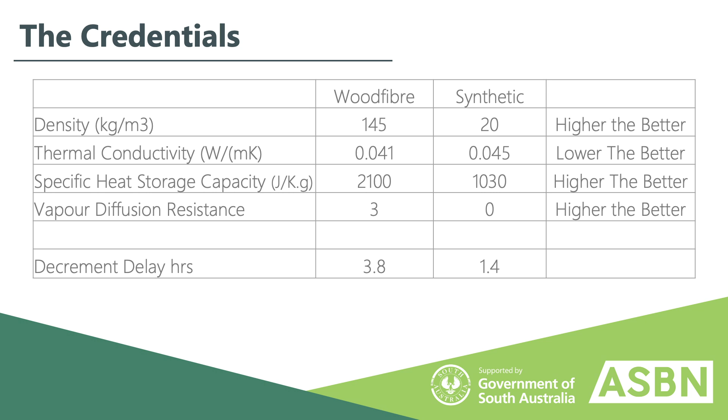So a bit of experience and knowledge. As mentioned, I've served my time in the UK as a master carpenter, a licensed builder in New South Wales, ran my own building company in the UK, where I researched healthy building materials and really questioned why we were doing what we were doing. Why are we using these materials that seem good on paper, but then you use them and they're difficult to detail, they're awkward to cut, they're itchy, loads of practicalities that you don't get from the classroom environment.

So the passive house, as most of you probably know, helps look at those components of a building: the insulation, the low thermal bridging, the airtightness, ventilation, the windows and the doors. But what it doesn't do is then use a technology like WUFI, which is an analysis software that will look at the temperature, the relative humidity and the moisture content within that proposed build-up that you can model in the PHPP.

And that will tell you, if you use these materials, you're going to get damp and interstitial condensation at this point in the building. And at these times of the year, it's more risky or less risky, et cetera. So again, it's not quite black and white. We've got to really understand what we're looking at and why we're choosing to look at it.

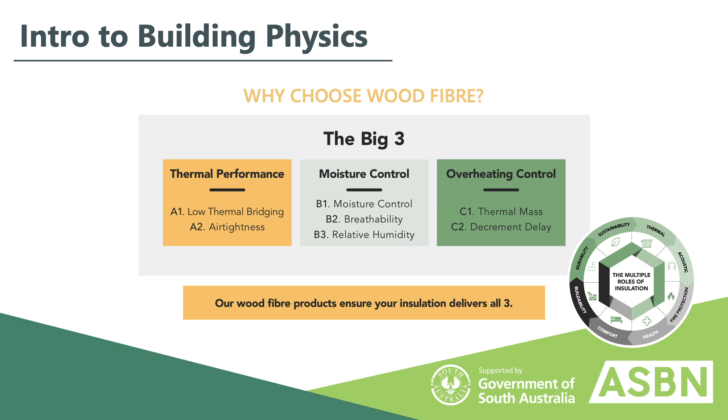So a bit of an intro to the building physics. The big three are the thermal performance, the moisture control, and the overheating control. So why would you choose wood fibre to look at some of these? Bit of a case study. A lot of this data is available on our website and materials. So if you do want to catch up with me later on, we can chat about that over the coming weeks.

This case study was a full wood fibre house, fully vapor permeable. And the case study is pretty interesting, with both positives and then a design review section that highlights the weaker points of the building and how to address that.

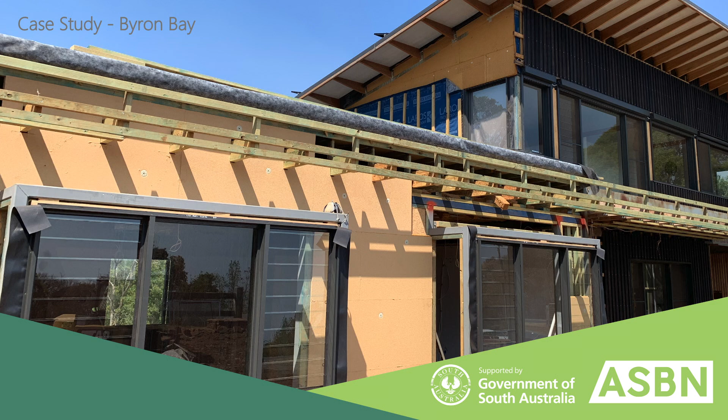So low thermal bridging, you basically just think of it as dropping a tea cozy over your house to reduce, and the phrase I use is low thermal bridging rather than thermal bridge free. Again, because it's not necessarily black and white. So low thermal bridging is basically the concept of wrapping your building to reduce those thermal bridges.

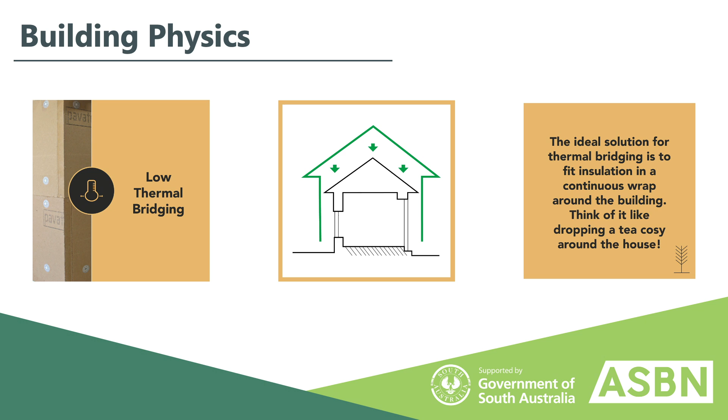A continuous wrap of insulation is the best way to do that. And bearing in mind, when you do that, you need to have one of those 4 criteria, which was high vapor diffusion. Airtightness, most people are fairly aware of this at the moment.

Vapor permeable membranes, and essentially reducing the leakage of that warm or cool air from inside your building to help maintain a more stable temperature with less fluctuations. So that's quite a crucial one.

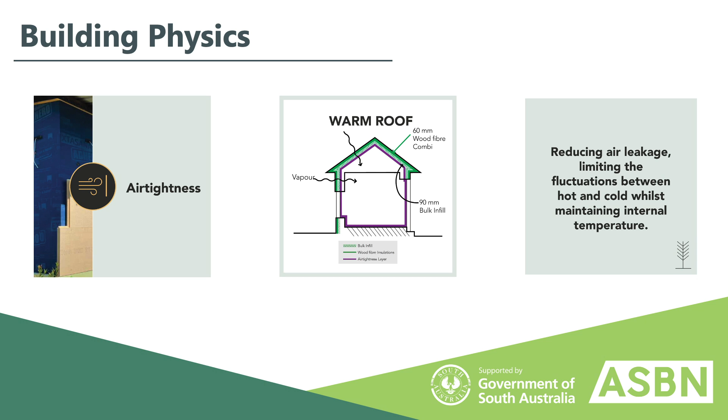Breathability. You obviously need to be allowing moisture and vapor to pass through the building. Now, this is a big one, particularly amongst builders who kind of think we've got to keep the moisture out, keep the moisture out, keep the moisture out. Okay, so don't have a shower, don't have a party, don't breathe. So we have to use materials that are highly vapor permeable.

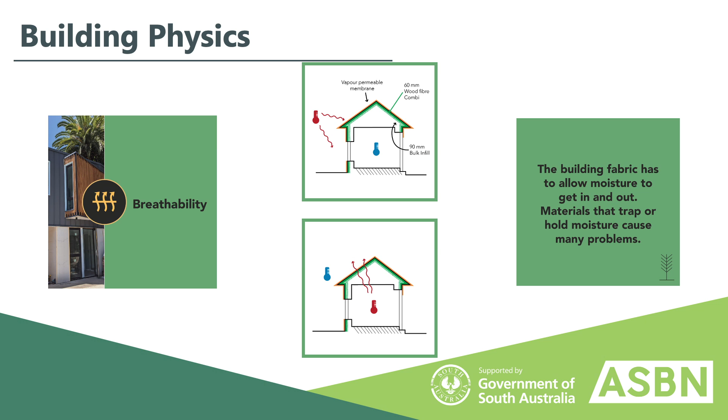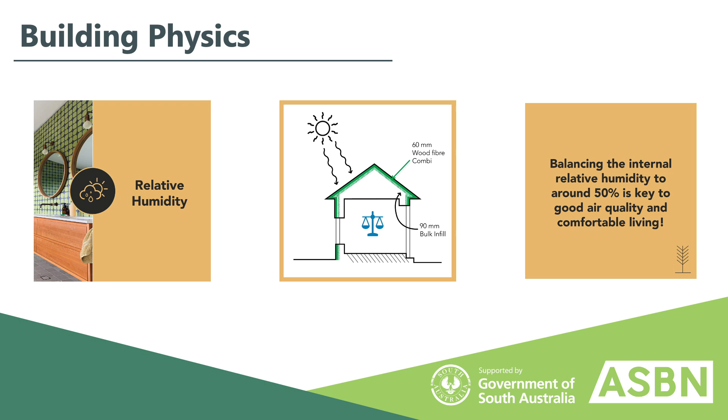Relative humidity. This is a bit more of a complex one, so I won't go too deep into it. But essentially achieving somewhere between 40 to 60% relative humidity with an ambient indoor temperature between 20 to 25 is going to be how we achieve optimal comfort and healthy air quality.

Thermal mass. Now, this is a really hot topic at the moment and some good discussions around it. So wood fibre is perfect for thermal mass. Now, before you think, what are you talking about, man? Concrete. Okay, so thermal mass is a conversation that we can have another time, and feel free to contact me directly about this.

But for thermal mass to work truly efficiently and in balance with all of the other building physics components and with those 4 criteria we talked around at the beginning, it isn't black and white, and it has to be considered in the design, the orientation of the building, the relative humidity levels, the WUFI analysis, and elements of the passive house design. So it really is quite complex.

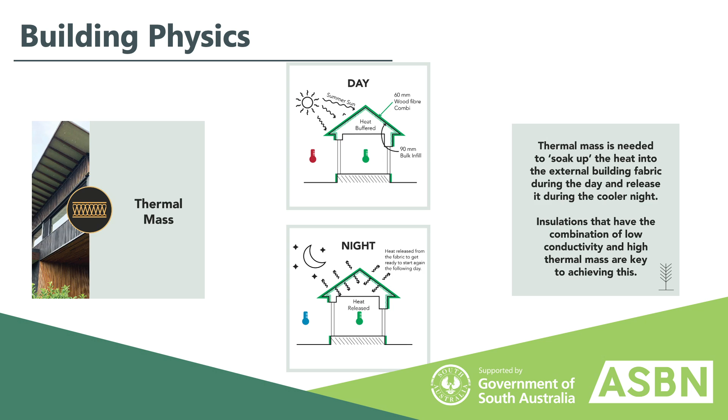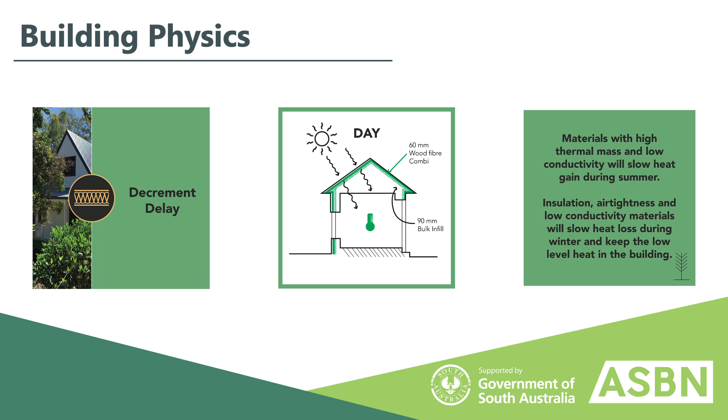But wood fibre is great for basically buffering the heat and keeping that heat in with the air tightness. So it's part of a system. It's not just a standalone product. And that also ties in with the decrement delay, which you saw on the credentials chart. So we want to slow that process down. And to do that efficiently, we need high heat storage capacity of a material with very low thermal conductivity of a material.

So in summary, the most cost-effective way to use as little energy on a house as possible is a fabric first approach. Then to slow the heat loss in the winter, we're going to use materials with very low thermal conductivity as a building wrap, along with the air tightness system. And to slow the heat gain in the summer, we're going to use materials with a high, that should actually say heat storage capacity, and low thermal conductivity.

Now, this is a big one that often people overlook. So this would be a great area where people go, we just need to insulate the house. It's black and white. We've got poorly insulated buildings, insulate. But the unintended consequence of that is that you essentially make the building more sealed. So you create more problems with damp and mold if you don't understand the physics and behavior of moisture, heat energy, and cold energy.

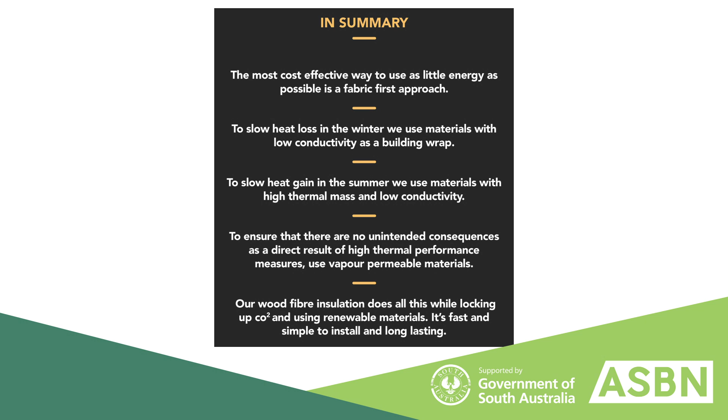So that's why, again, it has to be part of a process and a well-designed, thought-through model. And then the wood fibre, on another level, is fully renewable. It locks up CO2, and it's fairly quick and easy to install. Pretty much done, I reckon.